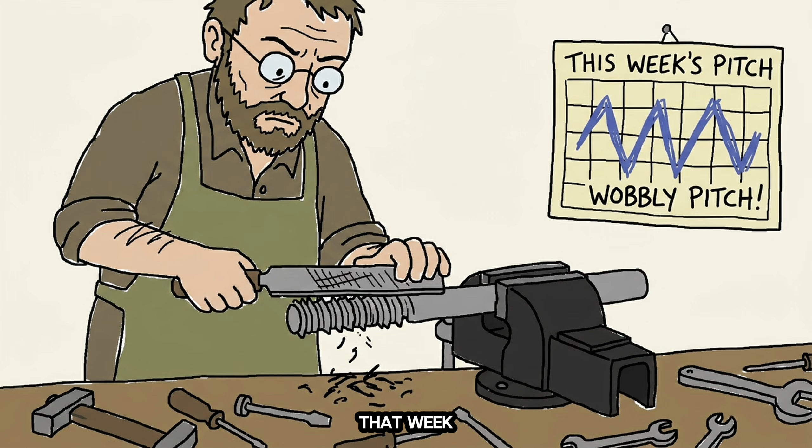Before a single machine could be reliably repaired, someone had to solve a problem most people never thought to name. If a bolt broke on a cotton mill in 1810, the replacement had to come from the same workshop that made the original. No other bolt would fit. Every thread was cut by hand, at whatever pitch the craftsman happened to prefer that week. Two bolts from two different shops looked identical from across a room and fit nothing interchangeably.

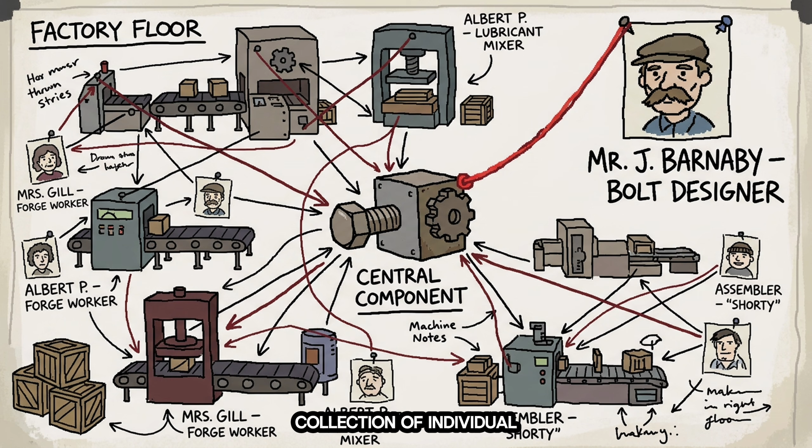This wasn't carelessness. It was simply how metalwork had always operated. One maker, one tolerance, one machine at a time. A factory floor in the early industrial period wasn't a system. It was a collection of individual relationships between parts and their original makers. When something broke, you didn't reach for a spare, you sent for the man who made it. That dependency had a cost. Downtime was expensive, repairs were slow, expansion was hard to plan around.

The screw itself was ancient. Wooden screws had been used in wine and olive presses since Roman times, maybe earlier. Metal screws appeared in European clockmaking and armor by the 15th century, but they were hand-filed, precious, and irreplaceable. Each one was a small custom object. Losing one wasn't a minor inconvenience, it was a manufacturing problem. A clockmaker in 1750 might spend more time fitting a single screw than assembling the mechanism around it.

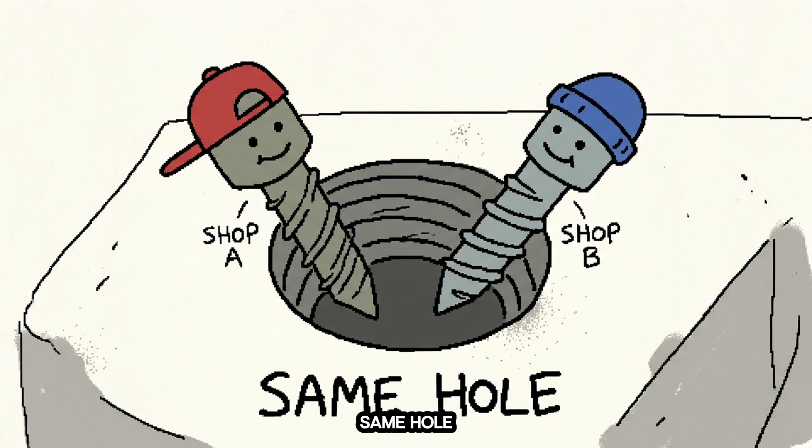The thread angle, the pitch, the diameter. None of it followed any external standard because no external standard existed. What changed wasn't the screw's basic shape. What changed was the idea that screws from different sources should fit the same hole. That idea sounds obvious now. In 1800, it was genuinely radical.

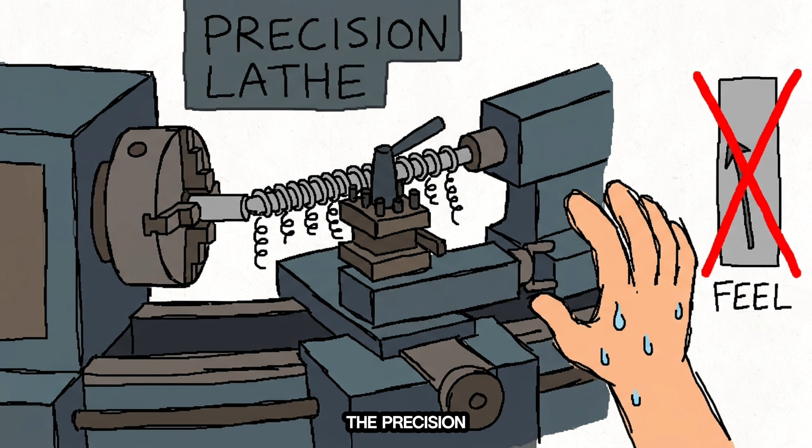The person most credited with pushing it forward in Britain was Joseph Whitworth, a machinist from Manchester who had an almost compulsive interest in precision measurement. Whitworth had worked under Henry Maudslay, who had already developed better lathes and screw-cutting tools in the early 1800s. Maudslay's contribution was the precision screw-cutting lathe, a machine that could reproduce threads consistently rather than relying on a craftsman's feel. But consistent within one workshop still wasn't the same as consistent across workshops.

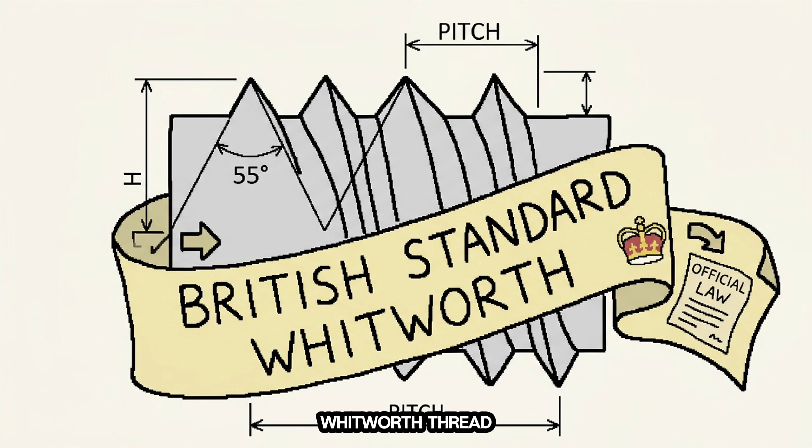Whitworth's proposal in 1841 was deceptively simple. Measure the actual threads in use across British industry and pick the most common angles and pitches. He examined dozens of sample screws from working factories, found that most clustered around a 55-degree thread angle, and recommended standardizing around that. The result became the British Standard Whitworth thread, the first nationally adopted screw standard in the world.

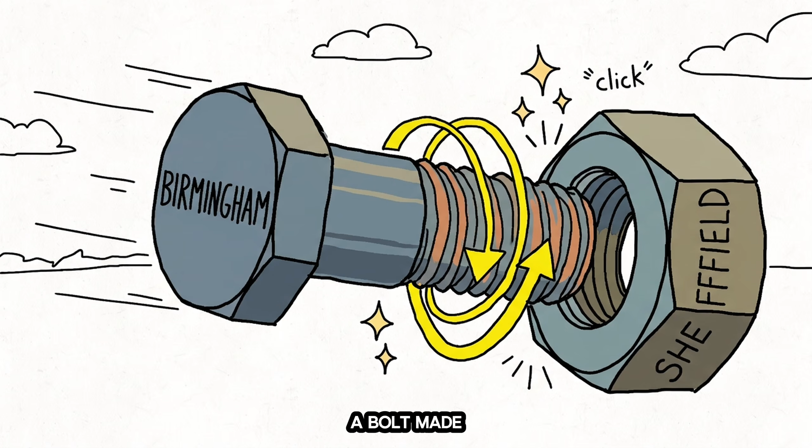It didn't cover every size. It wasn't perfect, but it was agreed upon, and agreement was the thing that had been missing. A bolt made in Birmingham could now, in principle, fit a nut made in Sheffield. That was new. The uptake wasn't instant. Manufacturers who had built entire product lines around their own thread dimensions didn't rush to retool. Retooling meant replacing taps, dies, gauges, and lathes. Real money, real disruption. Some firms held out for years, not from ignorance, but from rational calculation about switching costs.

What accelerated adoption was railway expansion. Britain's rail network in the 1840s and 1850s needed enormous quantities of standardized fasteners. A locomotive had thousands of screws and bolts. If each manufacturer used a different thread, maintenance across a network became a logistical nightmare. Railway companies began specifying Whitworth threads in their procurement contracts, and that purchasing power moved the market. Suppliers who wanted railway contracts standardized. Suppliers who standardized undercut those who didn't. The economics did most of the work.

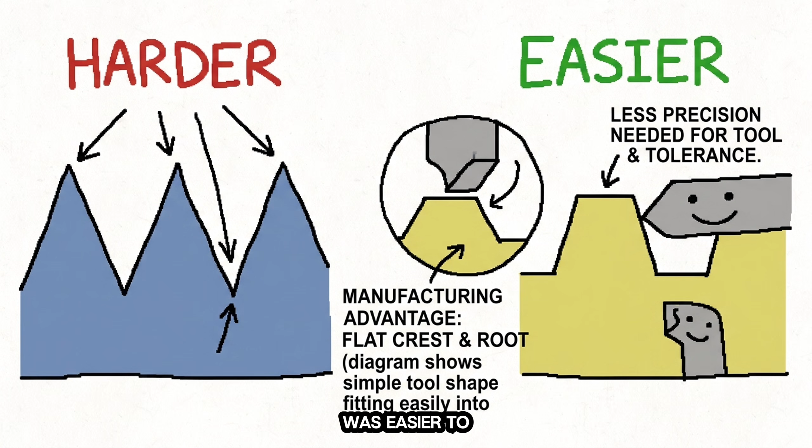Across the Atlantic, the same problem was developing independently, and the solution went in a slightly different direction. William Sellers presented a competing standard to the Franklin Institute in Philadelphia in 1864, recommending a 60-degree thread angle instead of Whitworth's 55. The Sellers thread, which became the basis for what Americans eventually called the Unified Thread Standard, was easier to manufacture because the flat crest and root were simpler to cut accurately. American industry, which was expanding rapidly after the Civil War, adopted the Sellers standard with less resistance than Britain had shown to Whitworth. The U.S.

Government formally endorsed it for military procurement in 1868, and from there it spread through American manufacturing as railway contracts had spread the Whitworth thread in Britain. For decades, a British bolt and an American bolt of the same nominal diameter simply would not interchange. The threads were close but incompatible. That gap caused real problems wherever British and American equipment appeared in the same workshop or on the same vehicle.

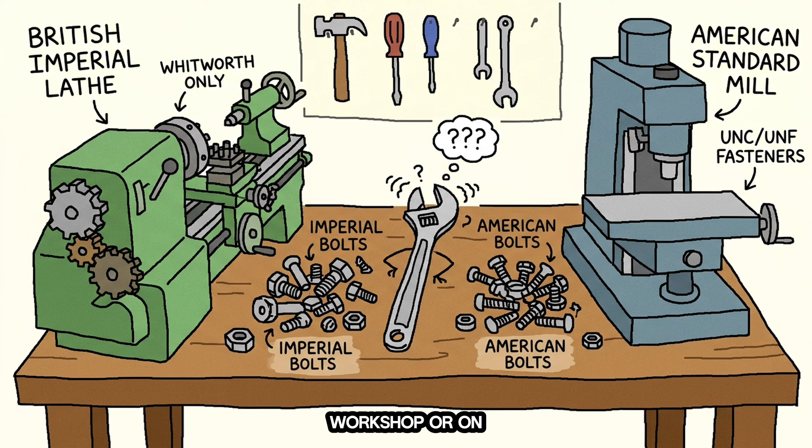During the Second World War, when Allied forces operated mixed equipment across theaters, the incompatibility between British Whitworth and American unified threads became a documented logistical issue. A mechanic's kit that worked on American trucks wouldn't necessarily work on British vehicles, even when the parts looked identical. That pressure eventually led to a joint agreement in 1948 between the United States, Canada, and the United Kingdom to create a unified thread standard, a single system both sides could use.

It took a world war and several years of negotiation to reconcile what two 19th century engineers had separately but almost simultaneously solved. The screw hadn't changed much. The argument was always about the thread geometry, not the basic concept. Meanwhile, the manufacturing of screws themselves had undergone a transformation that was just as significant as the standardization debate. Hand-filing threads was never going to produce screws at the volume industrial manufacturing required.

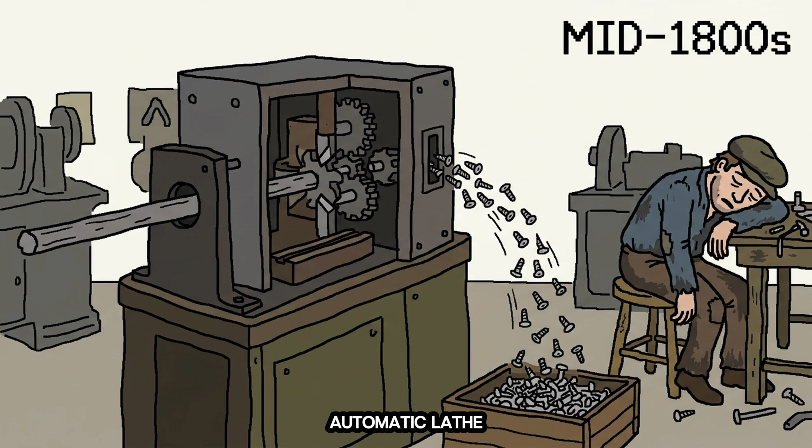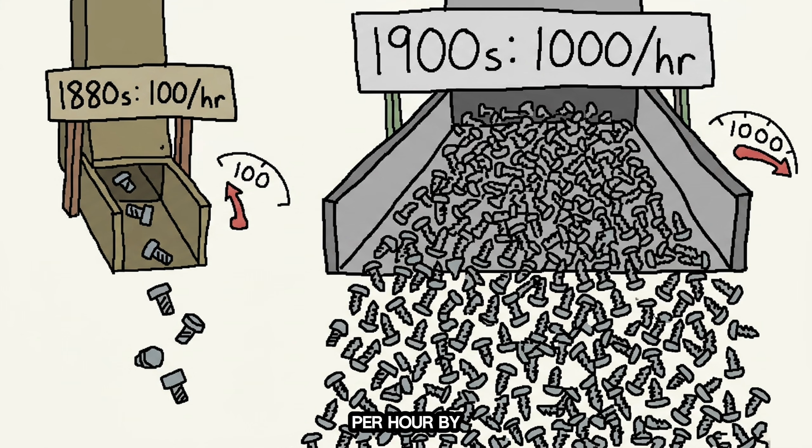The screw machine, a type of automatic lathe that could produce finished screws from rod stock with minimal operator intervention, began developing in earnest in the mid-19th century. By the 1880s, screw machines could produce hundreds of identical fasteners per hour. By the early 20th century, thousands per hour. The cost of a screw dropped so far that it stopped being a line item worth thinking about.

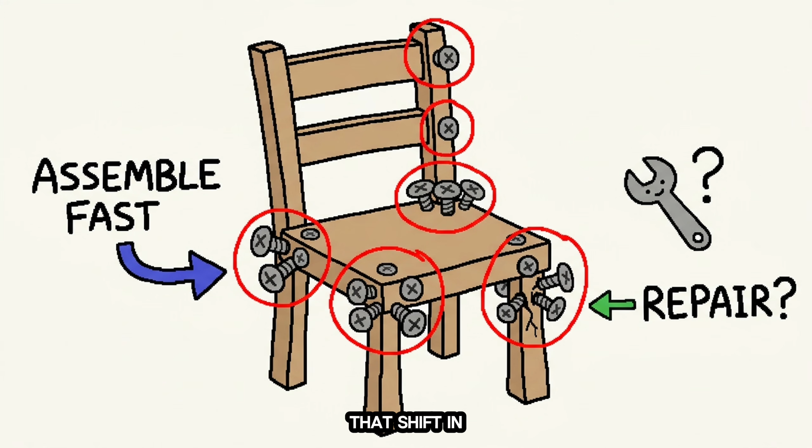A furniture maker in 1780 used screws sparingly, partly because they were expensive, partly because each one was slightly different from the last. A furniture maker in 1920 bought screws by the gross and didn't think twice about the decision. That shift in cost changed design. Products could be built with more fasteners, making them easier to assemble and, in theory, easier to repair. In theory, because repair assumes the replacement screw is the same as the original. Standardization made that assumption reasonable for the first time.

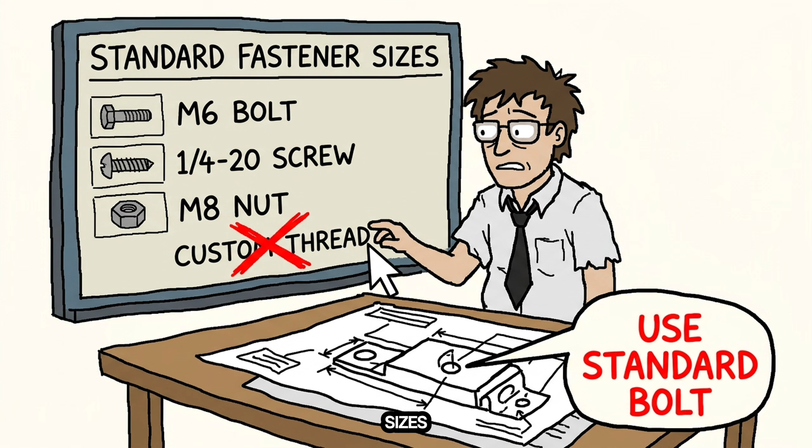Before that, a repairman working on someone else's machine was partly a detective, figuring out what the original maker had done. After standardization, the same repairman could carry a small assortment of standard sizes and handle most jobs without custom fabrication. That change in repair logic rippled through manufacturing design itself. Engineers began designing products around standard fastener sizes rather than specifying custom threads that only their own suppliers could produce. This sounds like a minor efficiency. It was actually a restructuring of how industrial supply chains worked.

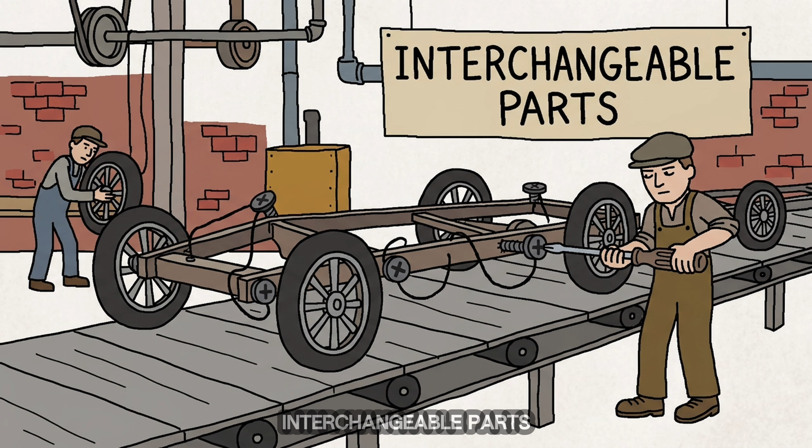A manufacturer no longer needed a captive workshop producing custom hardware; they could buy from any supplier meeting the standard. Competition among fastener suppliers drove prices down further. Standardization and cheapness reinforced each other in a loop that took decades to fully develop. The screw also quietly shaped assembly line logic. Henry Ford's factories famously depended on interchangeable parts, and fasteners were the connective tissue of that interchangeability.

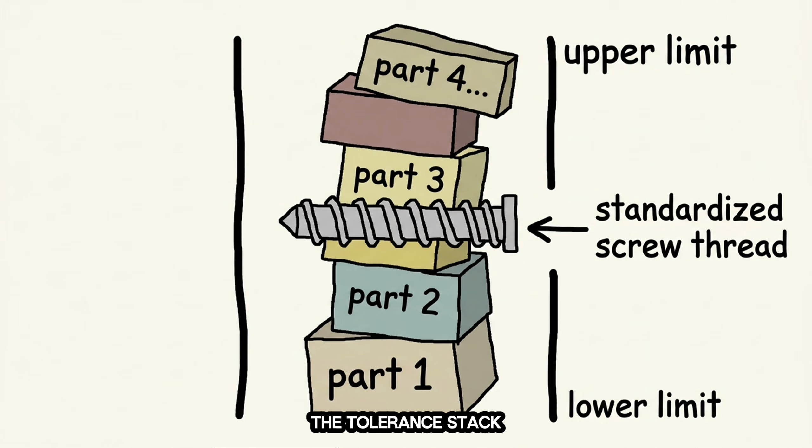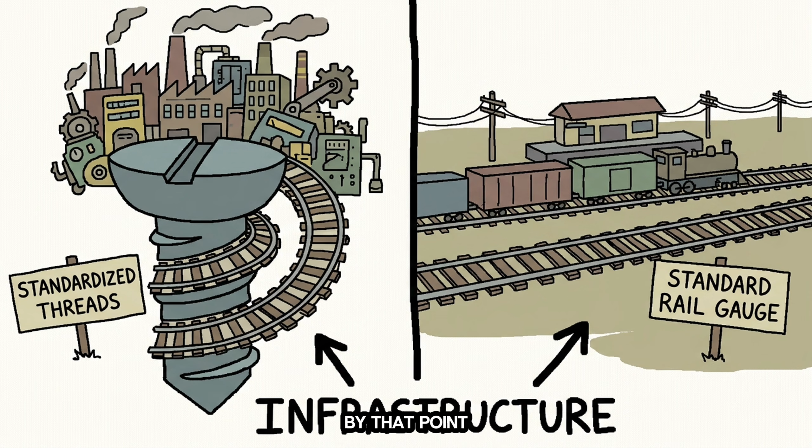You cannot have a moving assembly line if the bolts attaching one component don't reliably accept the nuts arriving from a different supplier. The tolerance stack, the accumulated variation across dozens of parts, had to stay within limits, and standardized threads were part of how that was controlled. A Model T had around 5,000 fasteners. Ford's purchasing and quality systems treated screw thread compliance as a baseline requirement, not an engineering achievement. By that point, a standardized screw thread was infrastructure, the same way standard rail gauge was infrastructure. You only noticed it when something violated it.

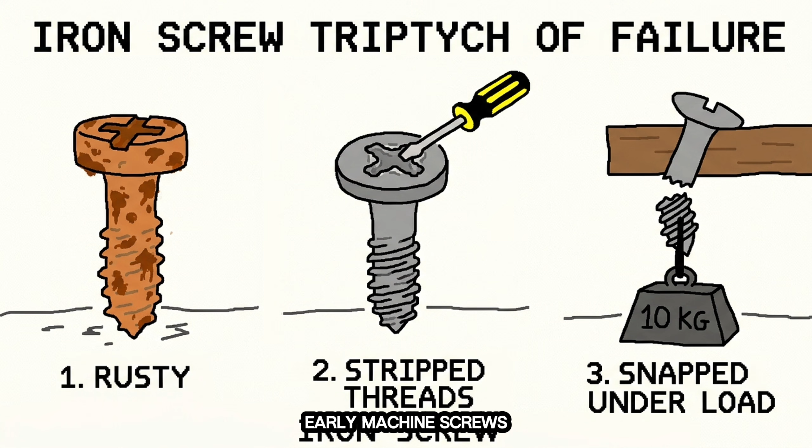The material of the screw itself evolved alongside standardization. Early machine screws were iron, which corroded, stripped, and snapped under load. Steel replaced iron as Bessemer and open hearth processes made it cheap enough for commodity hardware in the late 19th century. Zinc plating arrived as a corrosion solution for mild steel screws used in damp or outdoor environments. Stainless steel fasteners followed, first for chemical and food industry use, where corrosion was a serious operational problem, then gradually into consumer goods.

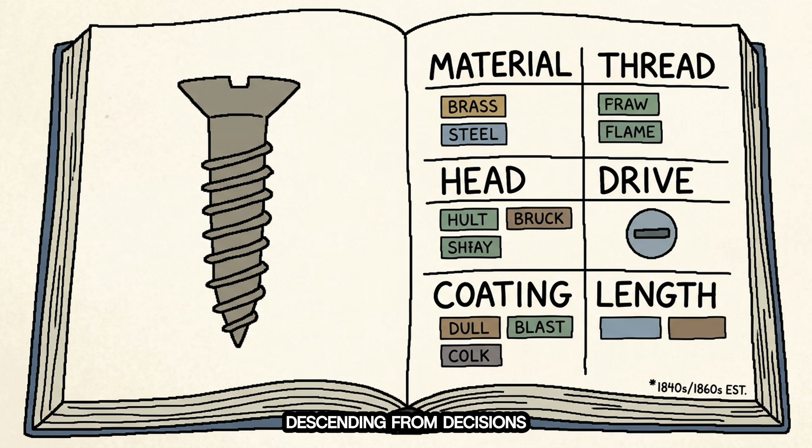Today, a single industrial fastener catalog lists screws by material, thread standard, head type, drive type, coating, and length, hundreds of combinations descending from decisions made in the 1840s and 1860s. The drive type is its own story.

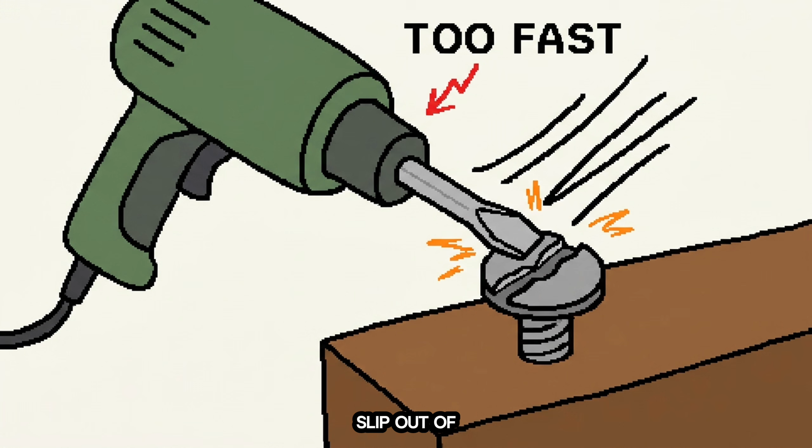The simple slotted screw head is older than industrial manufacturing and works reasonably well when you are turning it slowly by hand. It works less well when you are trying to drive it quickly with a powered tool, because the driver tends to slip out of the slot under torque. That slipping, called cam out, damages the head, slows the line, and frustrates everyone involved.

The Phillips head, developed in the 1930s and adopted by American automakers almost immediately, was specifically designed to cam out under high torque. That sounds like a flaw, and in home repair it often is. On an assembly line in 1936 it was a feature. Cam out prevented over-tightening, which had been stripping threads and cracking components at scale. The Phillips head was an engineering compromise that made sense for one context and became ubiquitous enough to define the experience of screws for everyone else.

The Robertson square drive, developed in Canada around 1908, resisted cam out without the Phillips limitation and is genuinely superior for most applications. Canadian manufacturing adopted it widely. American automakers mostly didn't, partly due to licensing disagreements with the inventor, partly due to existing tooling investments.

That decision, made in boardrooms in the 1910s and 1920s, is why most Americans still reach for a Phillips screwdriver even when a square drive would serve them better. Infrastructure decisions made a century ago determining what tool fits in your kitchen drawer. That is how standardization actually works in practice.

The Torx head came later, in 1967, offering even better cam-out resistance, and finding its way into automotive, electronics, and eventually consumer products. But each new drive type added a new tool requirement, which is why a complete screwdriver set now has 15 bits where one slot driver once sufficed. The proliferation of drive types is a small irony inside the larger story of standardization. More standards, not fewer, once the market fragments by application.

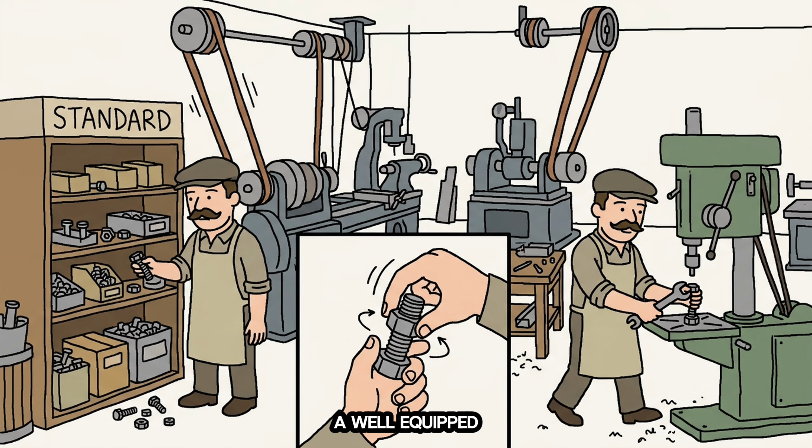Some details in the early history of screw standardization remain disputed or thinly documented, and different engineering histories weigh the contributions of Maudslay, Whitworth, and Sellers differently. What's less disputed is the practical outcome. By 1900, a machinist in a well-equipped shop could buy a bolt, expect it to fit a purchased nut, and repair equipment without sending back to the original maker. That expectation, ordinary now, genuinely new then, changed what manufacturing could attempt.

Machines could be designed for disassembly. Factories could be supplied by multiple vendors. Equipment could travel and still be serviced. The screw didn't make the Industrial Revolution, but the standardized screw made the Industrial Revolution repairable. And a system that cannot be repaired cannot scale.

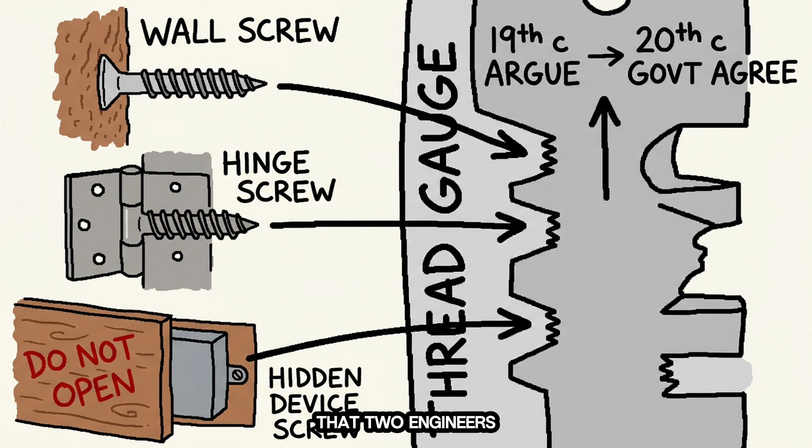The one sitting in your wall, or holding a hinge, or buried in the back of a device you'll never open, it fits a gauge that two engineers argued about in the 19th century and governments agreed on in the 20th. It is an agreement more than an object, and agreements, when they hold, become invisible.